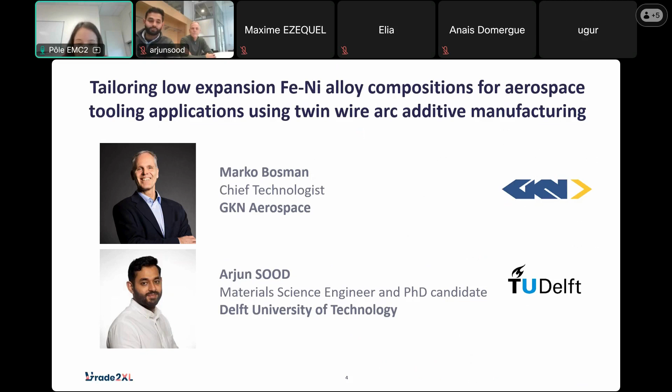The title of the presentation is to tailor the low expansion iron nickel alloys, typically known as INVAR, for aerospace tooling applications for composites. Let's go to the next slide.

We will start with a short introduction. I will speak about the application case of aerospace tooling for composites, what the challenges are there, and what additive manufacturing can do to face these challenges to make it better. Arjun will then go in depth into the specific alloy, which is a really special one that you will see later in the presentation, and we will give a future outlook on what might come next after this project.

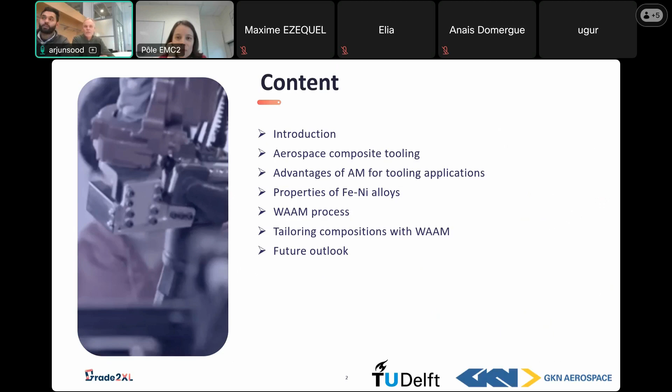Next slide, please. A little bit about Grade2XL. Lucy already explained what we are doing. It's a big consortium, but we have three objectives: to develop graded materials using wire arc additive manufacturing processes for really large scale applications, and to make it economically viable to be used in industry.

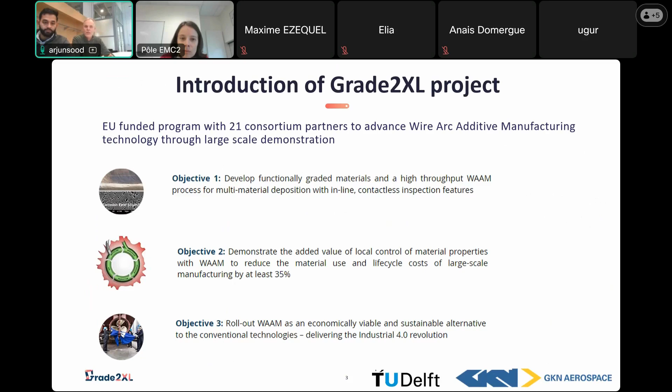Next slide, please. A little bit more in depth from my side - my name is Marko Bosman. I studied material science in Delft some time ago, working for about 25 years in the aerospace industry with Fokker. You see a nice Fokker aircraft that we don't build anymore, but it's still our legacy. The Fokker company was taken over by GKN Aerospace, now part of a bigger group with over 15,000 employees in multiple countries all over the world, serving as a tier one supplier to aerospace OEMs like Boeing and Airbus. We typically supply wings, tails, fuselages - big parts of aircraft towards the OEMs.

A little bit about myself - I graduated from TU Delft with a Masters in Material Science and Technology. Mainly I was involved with welding of metals, specializing in additive manufacturing, and also had some experience with weld metal cracking. From there, I moved on to take up a PhD role at TU Delft, focused mainly on additive manufacturing of low thermal expansion iron nickel alloys, within the framework of the Grade2XL program.

Let's elaborate a little bit on the background of this project and the use case we are using. It's molds for making composite parts, typically carbon fiber composites that we use in aerospace for lightweight, very strong constructions, which we very much like in the aerospace business. But to make these kinds of parts, we use molds to make the shapes, and this is typically the process we are using.

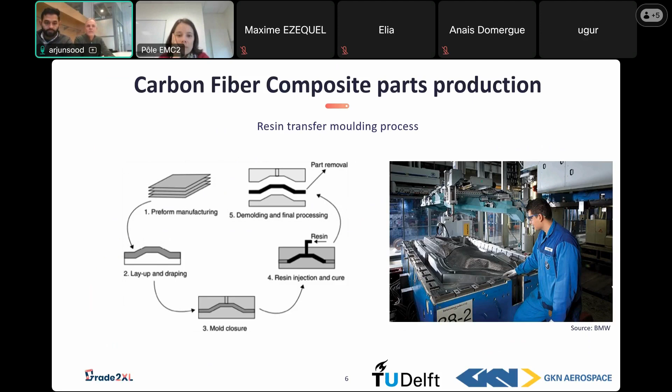I will show some examples. This is within GKN Aerospace, a typical fuselage. You see a bit of the sizes we are facing in making composite parts out of one single piece. This is a fuselage of a business jet. And we have another example.

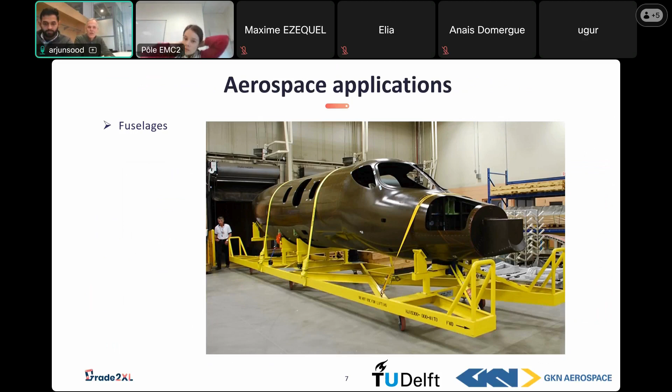Next slide, please - this is for making wing spars or spars for tails. In the big picture, you see a 17-meter long spar which came out of a double-sided tooling. On the left picture, you see an automated layup of such a piece on top of a mandrel that's made of invar material, because for these kinds of sizes we typically use invar material, and I'll explain a little bit about why we're doing it later.

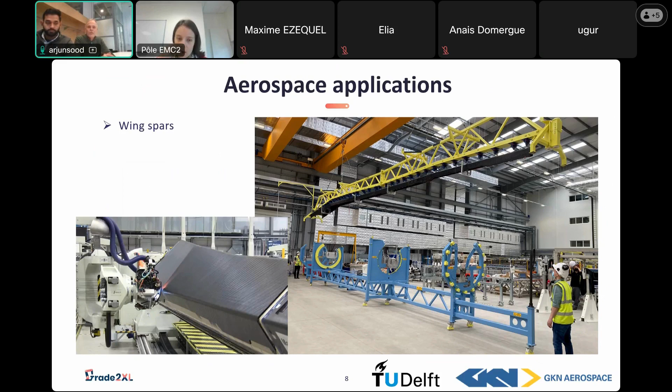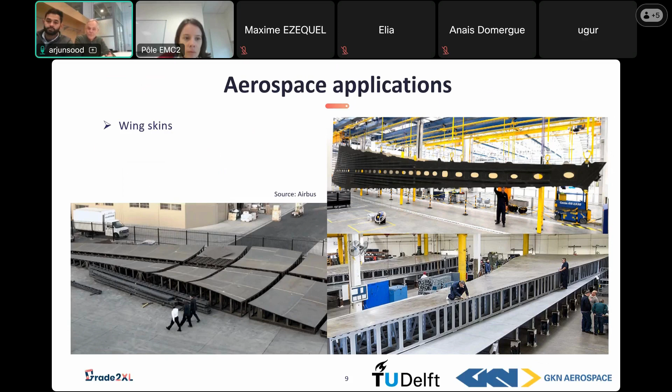The challenge is why we are using iron nickel alloys, because that's a really special one. We need to match the thermal expansion coefficients, or more accurately, the thermal shrinkage after your cure cycle to room temperature when it's still inside the mold. We have to match the carbon fiber part with the mold material.

And then we have the cooling down, which is the most critical part of the whole cure cycle, because that's where you determine the shape of the composite part, and that should come along with the mold.

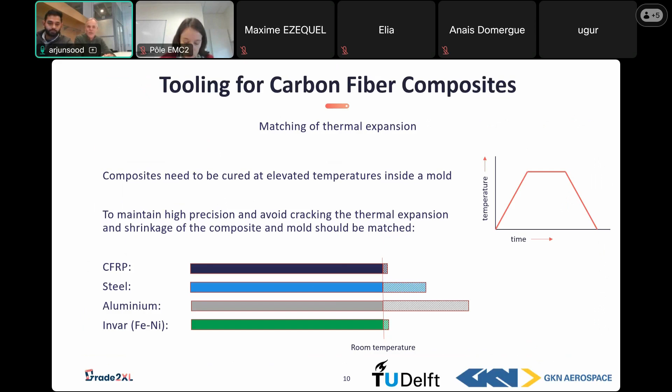But it has some special tricks around it, why it behaves like this, because this is not normal for a metal to behave. But Arjun will talk a little bit about that. In the next slide, I will explain a little bit more on the requirements for molding and why we are pursuing additive manufacturing as a potential technology to build these kinds of parts.

It should be stiff enough to withstand the pressures during the cure cycle, because typically we are using pressures like 3 to 6 bars to cure the part within the mold.

We are using vacuum to get all kinds of porosity out together with the pressure. That helps a lot, and because we are using a fabric type of part, we need this to get the porosity low in our composite part, so the mold should be vacuum tight.

Because we are doing a cure cycle with heating up and cooling down later on, we need heating and cooling elements, specifically when we have double-sided molds that we don't put in a big oven like an autoclave. We tend to move away from these kinds of really large capital equipment and go more toward multifunctional tooling where we include the heating and the cooling.

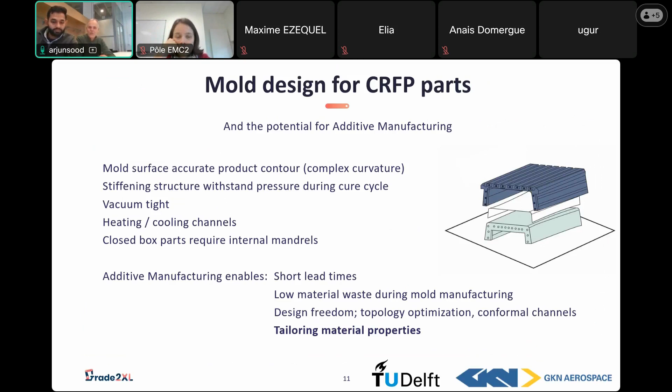What is actually AM will offer us what we cannot do today. And Arjun will share some of our initial steps towards this. Thank you, Marco.

With all this information about Invar alloys, I will actually start by introducing you to what this material is. Why is it so special?

Further on, when you increase the nickel content, you can get different low thermal expansion alloys. For example, if I go from 36 to 42, I can have an alloy called Invar 42 or alloy 42, and the thermal expansion properties for this alloy are retained up to a higher temperature.

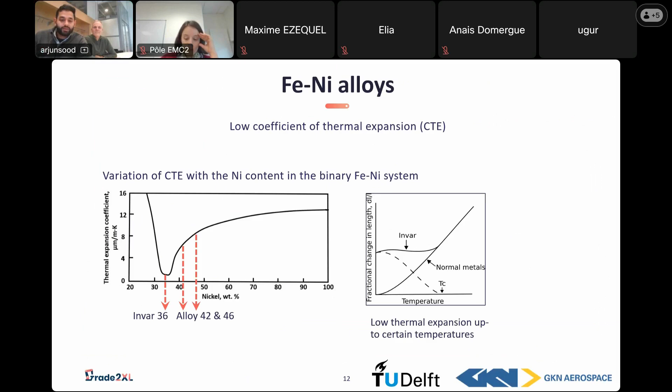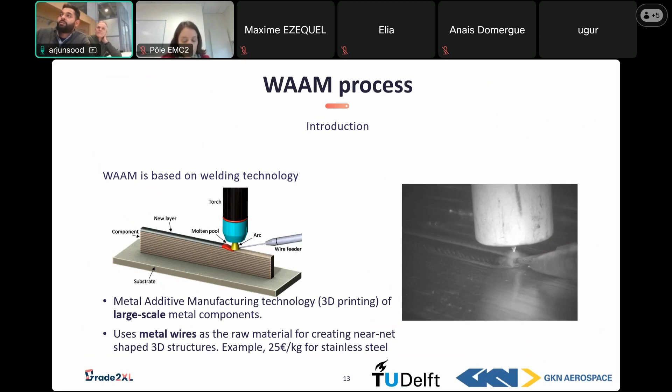In this figure, you can see the schematic of the process, whereas in reality, if you were to go look at the process, it would look something like this. You have a metal wire incoming, and then an electric arc which deposits the material layer by layer. This process is repeated again and again in order to generate the required 3D structures.

With this, we moved on to additive manufacturing of Invar 36. We started by depositing blocks around 20 millimeters in height and 100 millimeters in length. The first thing we found was that after cutting the blocks, they were very prone to cracking, and as you can imagine, these cracks are defects. So our first step was to figure out how we can avoid these cracks.

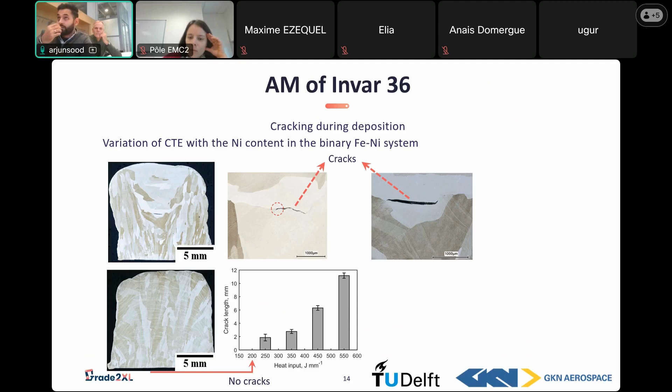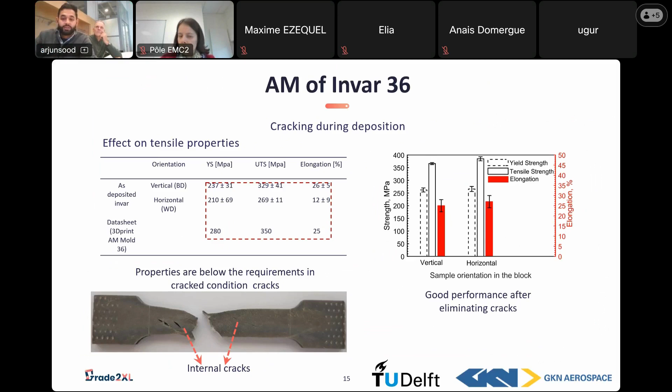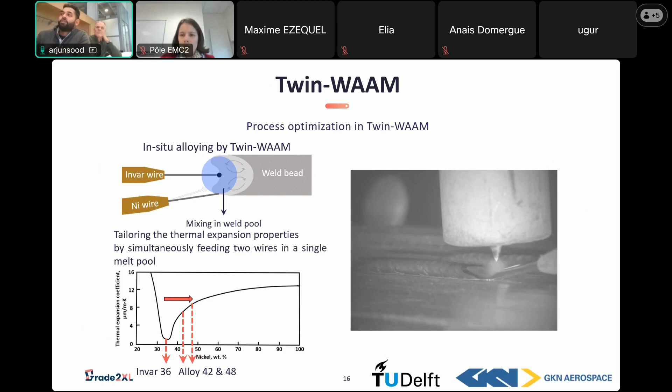However, initially you have to optimize the process, and one such condition of the optimized process is shown here. You can see clearly how we optimize the process by feeding two wires into the single melt pool, and by varying the wire feed speeds, you can obtain the required thermal expansion properties. This is a very good advantage of wire arc additive manufacturing, as in order to reduce lead times, like Marco mentioned, you can use this technology to deposit whatever composition you want.

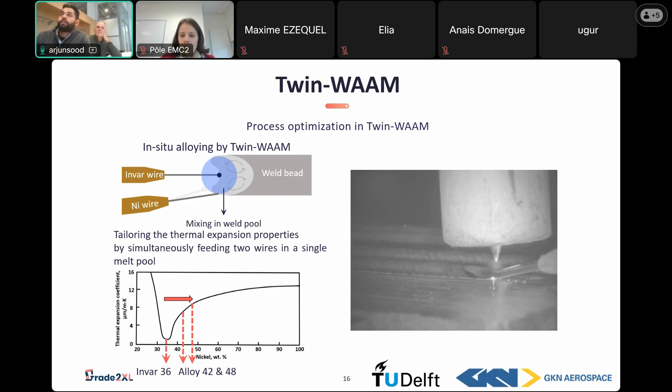In the next step, we deposited different low thermal expansion alloys. We deposited a block which comprised of different low thermal expansion alloys. We started from INVAR 42, moved on to INVAR 46, and then finally to INVAR 52. The first step was to cut the material and see if we have any major defects.

The result is shown in the figure on the right and below, where you can clearly see that the cracks which we had earlier in the single wire deposits were avoided. The reason for this was that we had already optimized our process parameters to maintain the lowest amount of energy required. By doing this, we can avoid major defects like cracks or other defects such as porosity that are very commonly found in additive manufacturing.

We have also seen that having these defects is undesirable, as you can imagine that when you start using this material in a loading application, it will very likely fail before it is required to.

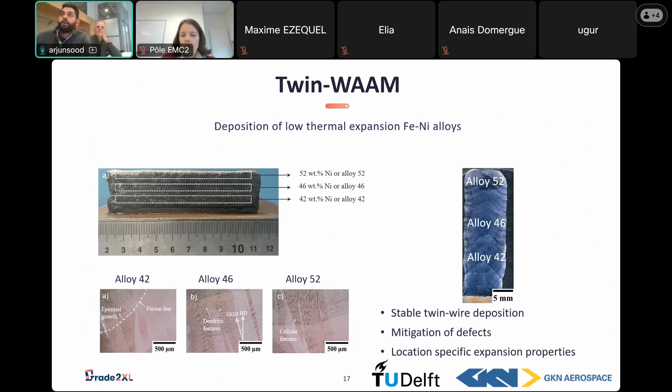Moving on to a more important consideration was to analyze whether the materials that we are depositing are actually being obtained. For this, you take your sample and analyze the chemical composition at different places. And when we did this, we clearly found our deposited material comprised of different chemical compositions.

Three distinct regions were identified, which corresponded to the desired compositions that we wanted: the first one was INVAR 42, the next one was INVAR 46, and the last is INVAR 52. By doing this, we have good control over the desired compositions that we want.

Also another important thing in this case is to have a gradual transition from one composition to the next. This is very important in order to avoid compatibility issues within different materials, because if there is a sharp transition, you can imagine if one material expands less compared to the other, and there's a sharp transition between two, it will very likely lead to cracking.

But by using wire arc additive manufacturing with two wires, in a controlled manner by optimizing the process parameters initially, you are able to achieve a smooth transition from one alloy to the other and also deposit the desired compositions that you want.

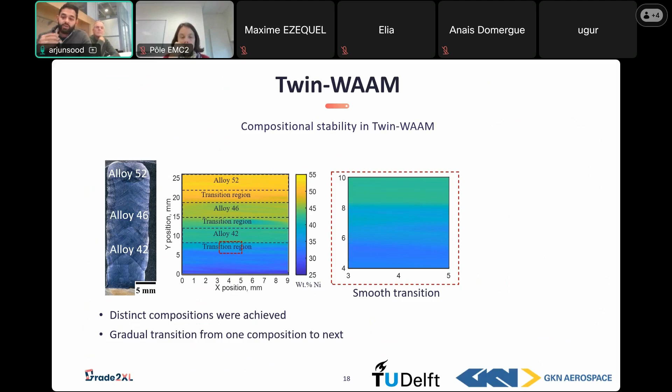The desired compositions are further analyzed chemically, because another aspect of feeding multiple wires is whether your material is mixing properly or not. A common problem during welding can be related to segregation, which means that when you try to feed different materials, they are not really mixing and just separating into one another.

And this was very good for us, as you can have a good control over the deposited compositions. Overall, what this gives us is a very nice, precise control over the compositions that you want, and also the mixing that can be achieved during the dynamical nature of the wire arc additive manufacturing process.

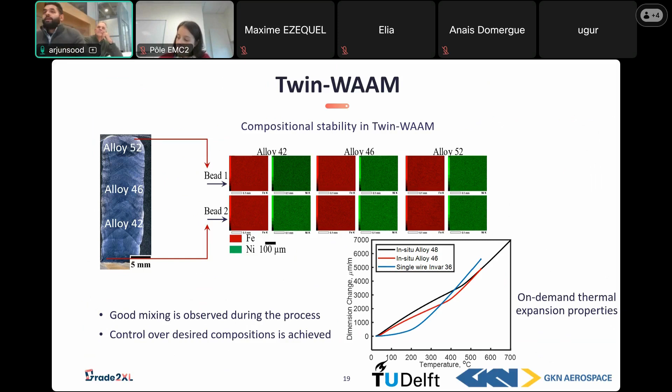So if you go for a certain temperature, you could choose your iron nickel composition to get the best match, to finally get the highest accuracy composite parts out of it.

You could also look at locally changing your composition, where you then locally change your thermal expansion behavior, where you can, for instance, use that for geometries that need to be released easily from your mold. You can let the mold, by expansion, open or close at specific locations.

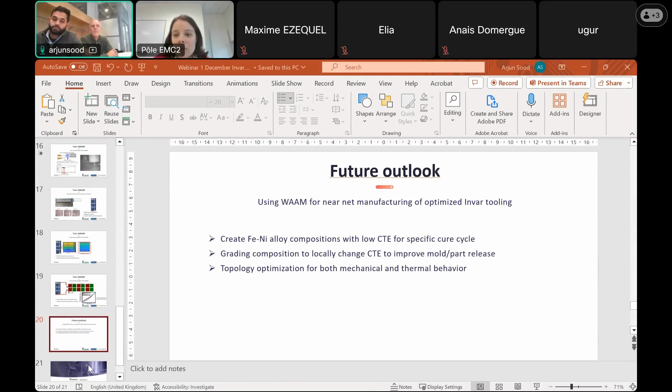For sure, yeah. Because the equipment that you actually need for this is not very special. You actually need a welding robot, and if you have a welding robot, you could do wire arc additive manufacturing if you understand the process well. So there are several parties also within France that are exploring this. Among them is Naval Group.

Yeah, indeed, Naval Group in Nantes-Indret is part of the consortium, and they are actually producing two of the demonstrators of the Grade2XL project.

There is a question from Maxime: Are the scientific results enabling to foresee an industrial exploitation? Is GKN Aerospace planning to use such multi-material molds in the future?

Yes, in the future, for sure. But to be honest, it's still a long way to use this on really the size that we need in our company. But we are making great progress here. We are going to show it on a demonstrator mold within the Grade2XL project, which is about almost 2 meters long. That's a good start towards real applications, but we need to go bigger than that, and we need to mature the supply chain so that it actually can do this.